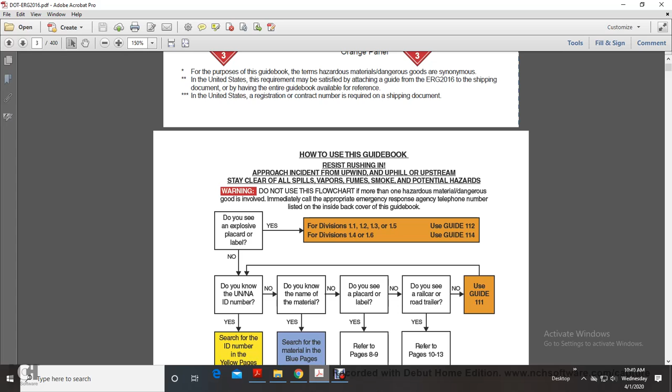So we have divisions 1.1, 1.2, 1.3, 1.5, use guide 112. Divisions 1.4, 1.6, use guide 114. Do you have explosive placards for them? If you did, yes, they would be orange.

And then, no, do you have the UN number? If no, then do you have the name of the material? If yes, you search the material in the blue pages. If you do have the number, the UN number and ID number, search the ID in the yellow pages and determine the guide number. Do you see the placard label?

Refer to pages 8 and 9. Do you see a rail car or road trailer? Use pages 10 through 13. And if no, use guide 111 and go back to the UN ID number.

Is the material highlighted in green? No, use the appropriate orange guide. Yes, is the material on fire? Yes, use appropriate orange guide for evacuation distance.

That's in green. Before an emergency, become familiar with this guidebook: local emergency telephone numbers, contractors, rail companies, federal, state, provincial agencies, and others.

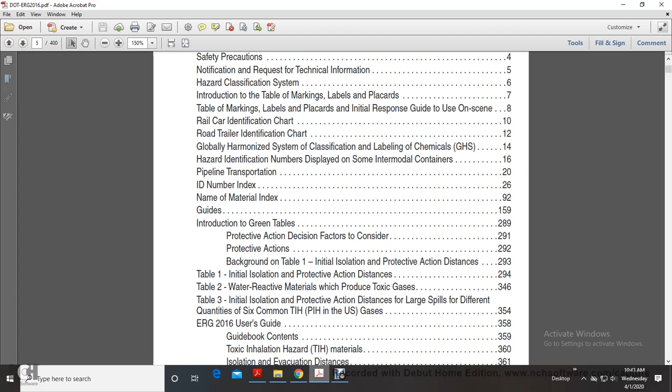Table 1, initial isolation and protective action distances. Table 2, initial isolation and protective action distances for water reactive materials that produce toxic gases. Table 3, initial isolation and protective action distances for large spills of different quantities of TIH or PIH gases in the U.S.

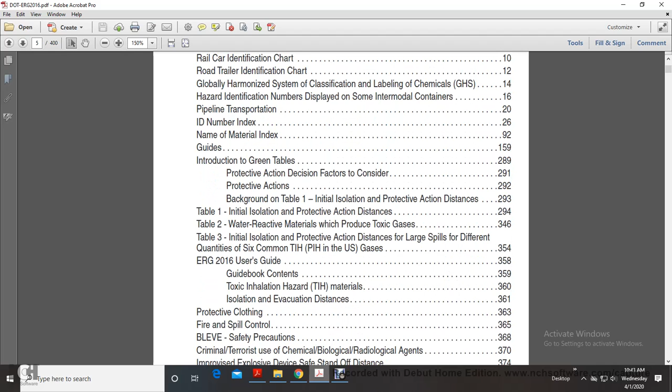Emergency Response Guidebook 2016 user guide content: toxic inhalation materials, isolation and evacuation distances, protective clothing, fire and spill control, BLEVE, safety precautions for criminal or terrorist chemical, biological, radiological agents, improvised explosive device safe stand-off distances, glossary, Canada-United States Response Center, emergency response assistance plans, emergency response telephone numbers.

Alright, safety precautions. Resist rushing in. Approach cautiously from upwind, uphill, upstream. Stay clear of vapor, fumes, smoke, and spills. Keep your vehicle at a safe distance from the scene. Secure the scene, isolate the area, and protect yourself.

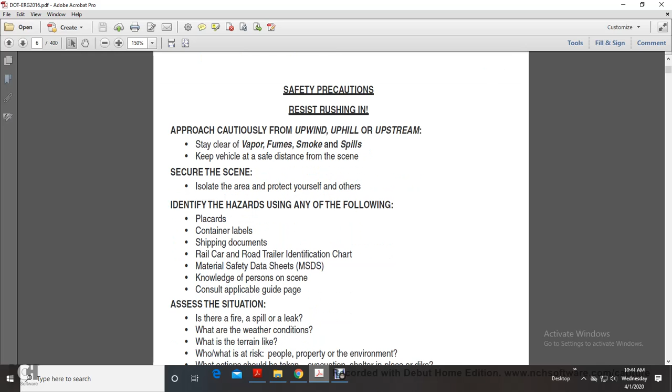Identify hazards using any of the following: placards, containers, labels, shipping documents, rail car or road trailer identification, material safety data sheets, and by knowing the person on the scene. Consult the applicable guidebook and guide page. Assess the situation: is there a fire, spill, or leak?

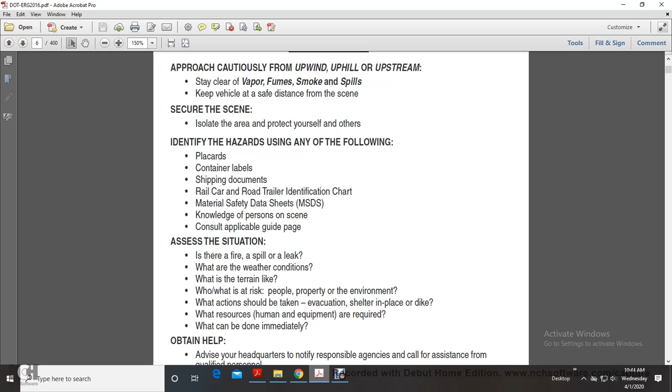What are the weather conditions and terrain like? Who and what is at risk - people, property, environment? What actions should be taken - evacuation, shelter in place, diking? What resources, human and equipment, are required? What can be done immediately?

Protective gear, rescue attempts, and protecting property must be weighed against your becoming part of the problem. Establish a command post and lines of communication. Continue to reassess the situation and modify your response accordingly. Consider the safety of people in the immediate area first, including your own safety.

Above all, do not assume gases and vapors are harmless because of a lack of smell. Odorless gases and vapors may be harmful. Use caution handling empty containers; they may still present a hazard until they are cleaned up, purged, and all residue removed.

Notify and request technical information. Follow the steps outlined in the organization's standard operating procedures and/or local emergency response plan. Obtain qualified assistance. The general notification sequence and request for technical information beyond what is available in the guidebook shall occur in the following order.

Notify your organization or agency; based on the information provided, that will set in motion a series of events. Actions may range from dispatching additional trained personnel to the scene, to activating the local emergency response plan. Ensure local fire and police departments have been notified.

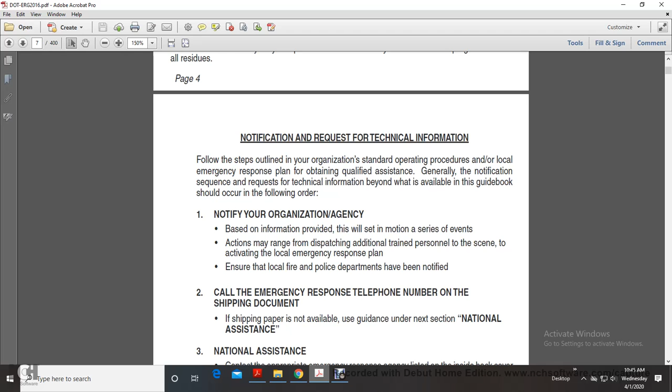Call the emergency response telephone number on the shipping document. If the shipping paper is not available, use the guidance under national assistance and contact the appropriate emergency response agency listed on the inside back cover of the guidebook.

Provide as much information as possible about the hazardous material and the nature of the incident. The agency will provide immediate advice for handling the early stages of the incident, will contact the shipper or manufacturer for more detailed information if necessary, and will request on-scene assistance if necessary.

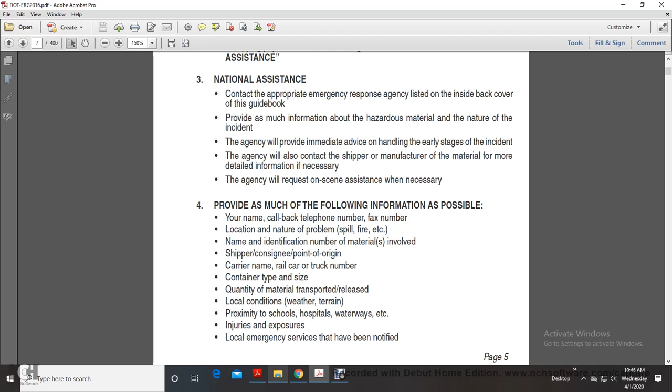Provide as much of the following information as possible: your name, callback telephone number, fax, location, and the nature of the problem such as spill or fire. Also provide the name and identification number of the material involved, shipper, consignee, point of origin, carrier name, rail or truck number, container type and size, quantity of material transported or released, local conditions such as weather and terrain, proximity of schools, hospitals, and waterways, injuries, exposures, and whether local emergency services have been notified.

The hazard classification system for dangerous goods indicates either by class or division number and name. Placards identify the class, division, and material. The hazard class and division numbers must be displayed in the lower corner of the placard, requiring both primary and subsidiary hazard class divisions if applicable, for other than Class 7 placards, indicating the hazard.

Division 1.1: explosives that have a mass explosion hazard. Division 1.2: explosives that have a projection hazard but not a mass explosion hazard. Division 1.3: explosives that have a fire hazard, and either a minor blast hazard, a minor projection hazard, or both, but not a mass explosion hazard. Division 1.4: explosives which present no significant blast hazard.

Division 1.5: very insensitive explosives with a mass explosion hazard. Division 1.6: extremely insensitive articles which do not have a mass explosion hazard.

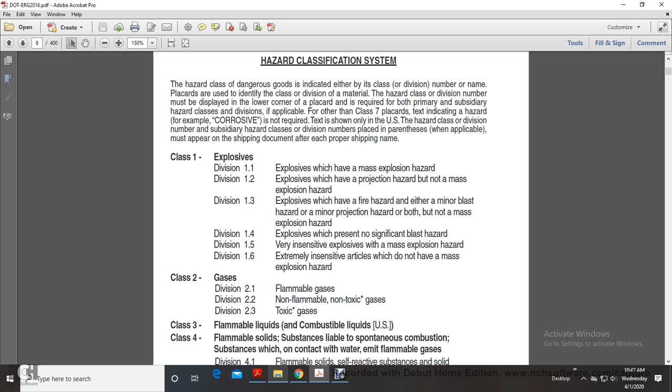Class 2, gases: 2.1 flammable gas, 2.2 non-flammable non-toxic gas, 2.3 toxic gas. Class 3: flammable liquids and combustible liquids.

Division 4.2: substances liable to spontaneous combustion. Division 4.3: substances which on contact with water emit flammable gas.

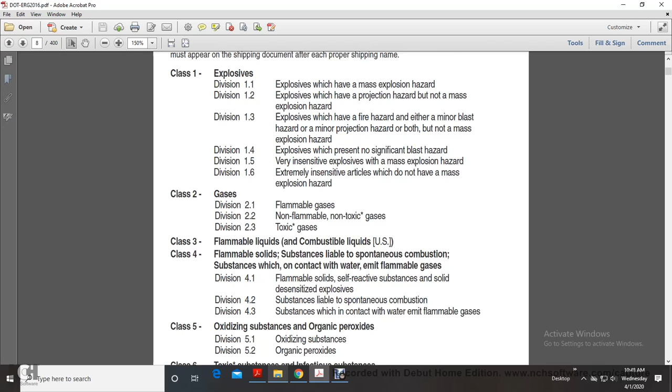Class 5: oxidizing substances and organic peroxides. Division 5.1: oxidizing substances. Division 5.2: organic peroxides.

Class 6: toxic substances and infectious substances. Division 6.1: toxic substances. Division 6.2: infectious substances.

Class 7: radioactive material. Class 8: corrosive substances. Class 9: miscellaneous dangerous goods, hazardous materials, and articles. The word poison or poisonous is synonymous with the word toxic.

Refer to the introduction table of markings, labels, and placards. Use the table only when the ID number and proper shipping name are not available. The next two pages display the placards found on transport vehicles carrying dangerous goods applicable reference guide circled. Follow these steps.

Approach the scene from upwind, uphill, or upstream, keeping a safe distance. Read the placard or orange panel using binoculars if available. Match the vehicle placard to the placard displayed on the next two pages, then consult the orange guide page associated with that placard.

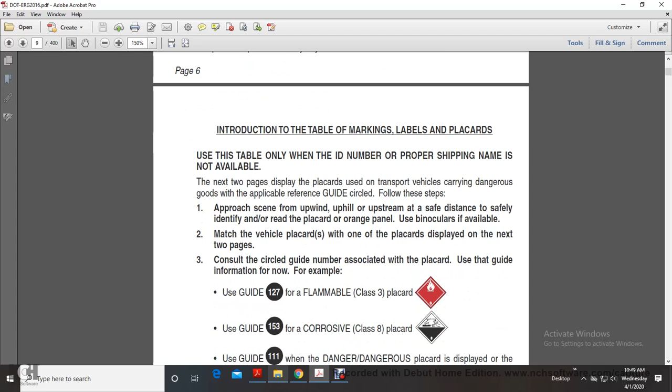Use the guide information as the example: use Guide 127 for the flammable Class 3 placard, and use Guide 153 for the corrosive Class 8 placard.

Use Guide 111 when the dangerous placard is displayed or the nature of the spill, leak, or burning material is not known. Use Guide 111 when dangerous goods are suspected but no placards can be seen.

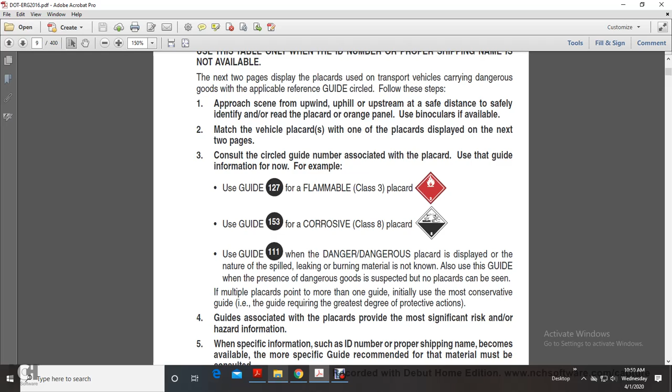If multiple placards point to more than one guide initially, use the most conservative guide, the one requiring the greatest degree of protective action. The guides associated with the placard provide the most significant risk and hazard information. When specific information such as the ID number or proper shipping name becomes available, the more specific guide recommended for the material must be consulted.

A single asterisk on the orange placards represents the explosive compatibility group letter. The asterisk must be replaced with the appropriate compatibility group letter. Refer to the glossary.

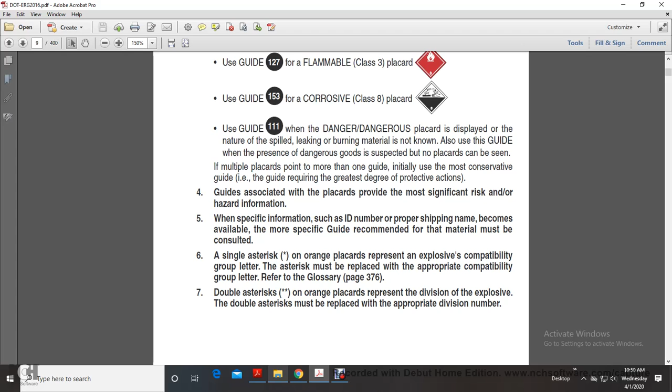Page 376. A double asterisk on orange placards represents the division of the explosive. The double asterisk must be replaced with the appropriate division number.

These are the table of markings, labels, and placards. Use the table only if the materials cannot be identified.

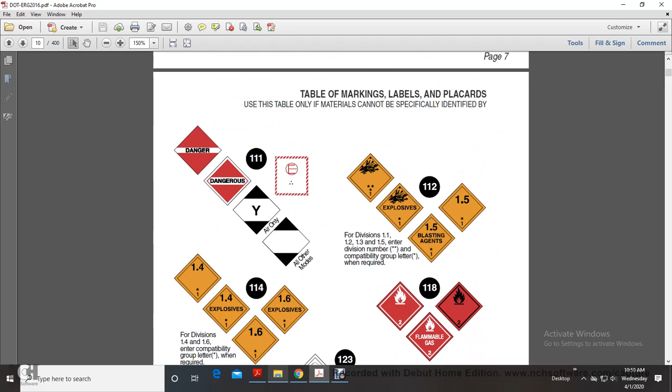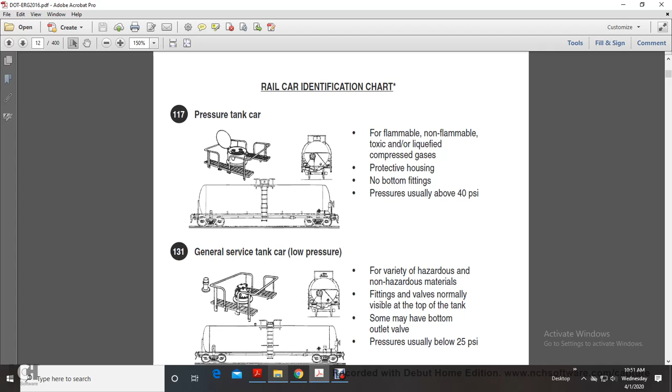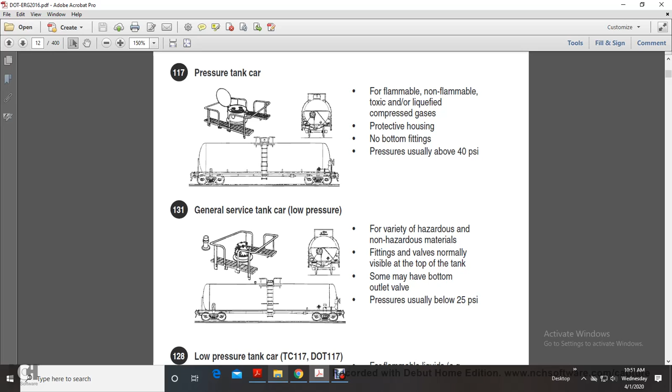131, general service tank car, low pressure, and it shows the top, the bottom, and the side. The sides and the top. Variety of hazardous, non-hazardous material fittings. Valves normally visible at the top of the tank. Some may have bottom outlet valves. Pressure usually below 25 psi.

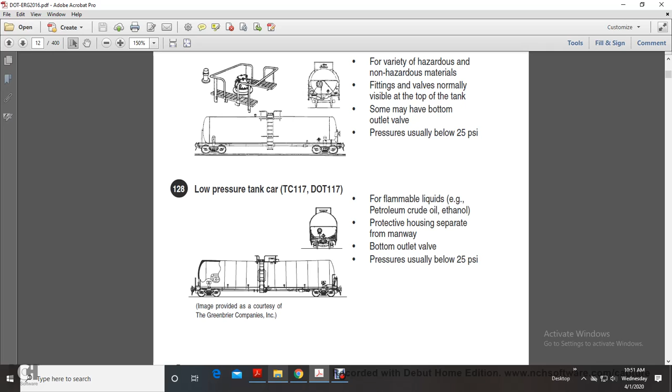Your low pressure tank, the TC-117 and the DOT 117. Image provided courtesy of the Greenbrier Companies Incorporated. For flammable liquids, petroleum, crude oil, ethanol, protective housing separated from the manway. Bottom outlet valve, pressure usually below 25 psi.

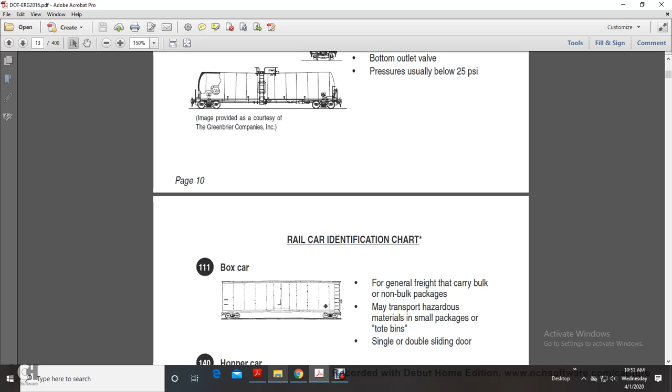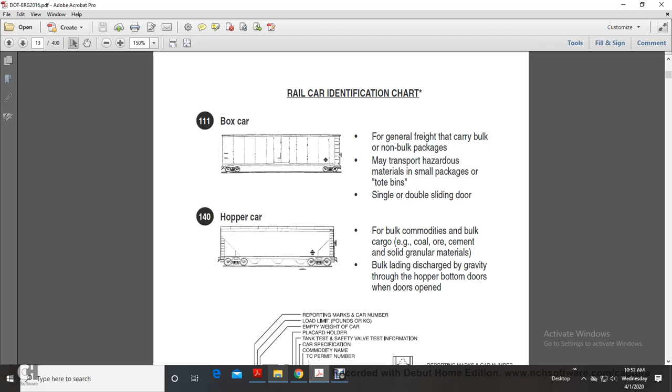Your boxcar, general freight car, barrel bulk, non-bulk boxes, packages, many transport hazardous material, small package, total, tote bin, single, double sliding doors - that's 111 for boxcar, 140 hopper car. For bulk commodities, bulk cargo, coal or cement, solid granular materials, bulk lading, discharge gravity through the hopper bottom doors when doors opened.

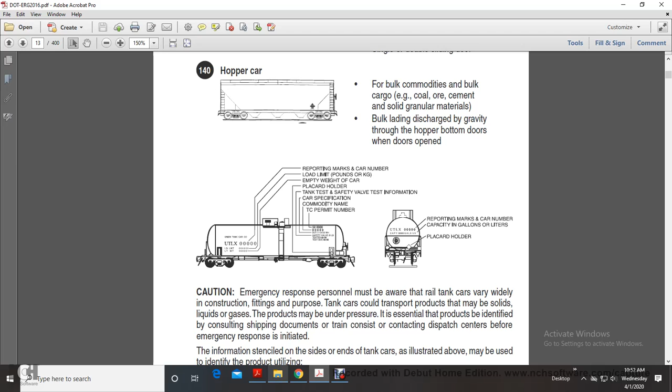And then it shows a tanker car with reporting marks, numbers, load limit pounds, empty weight, placard, tank test, safety valve test information, car specification, commodity name, permit number, reporting marks, car number, capacity in gallons, or liters, and placard holder.

Caution: emergency response personnel must be aware that railroad tank cars vary widely in construction, fitting, and the purpose of the products they transport. They may be solids, liquids, or gases. The products may be under pressure. For the identity of the product, consult the shipping paper and the train consist, contacting dispatch center concerns before emergency response is initiated.

Information stenciled on the sides or ends of the cars illustrated above may be used to identify the product, utilizing the commodity name shown. The other information shown, especially reporting marks and car number, when supplied to the dispatch center, facilitates identification of the product. Recommended guides should be considered as last resort if the material cannot be identified by other means.

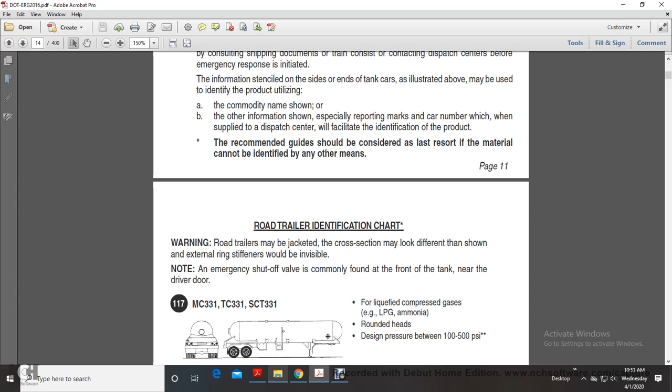Your road trailer identification chart. Road trailers may be jacketed and the cross-section may look different than shown. External ring stiffeners would be invisible. An emergency shutoff valve is commonly found on the front of the tank near the driver's door.

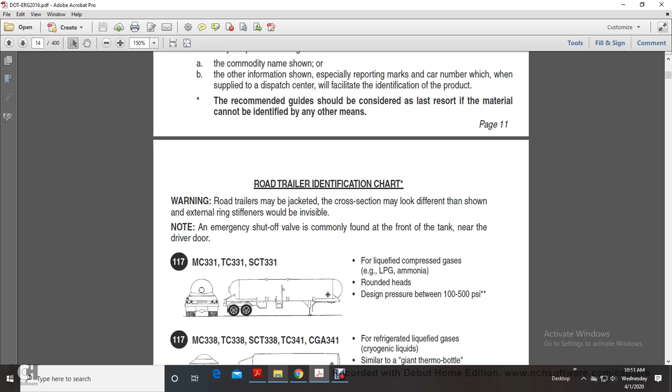117 MC331, TC331, SCT331. This is for liquefied compressed gases, round heads, design pressure 100 to 500 psi.

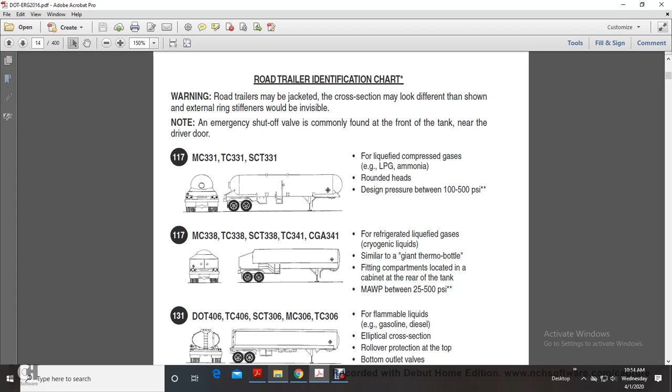Your 117 MC338, TC338, SCT338, TC341, CGA341. Refrigerated liquefied gases is cryogenic liquid, similar to a giant thermo bottle. Fitting compartments located in the cabinet over the rear of the tank. Maximum allowable working pressure from 25 to 500 psi.

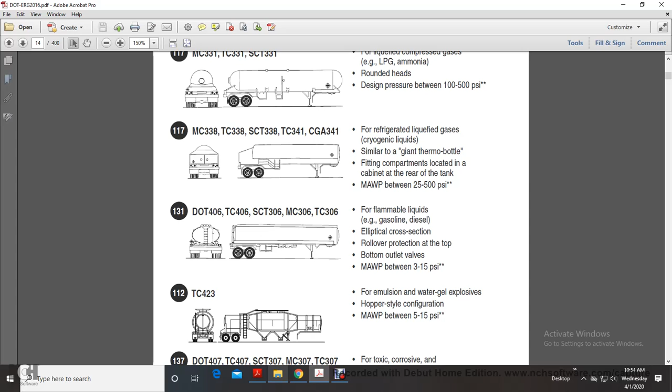The trailer 131 DOT406, TC406, SCT306, MC306, TC306, for flammable liquids, gasoline, diesel, elliptical cross-section, roll-over protection, top and bottom outlet valves, maximum working pressure 3 to 15 psi.

Your 112 TC423 for emulsion water gel explosive, hopper style configuration, maximum working pressure 5 to 15 psi.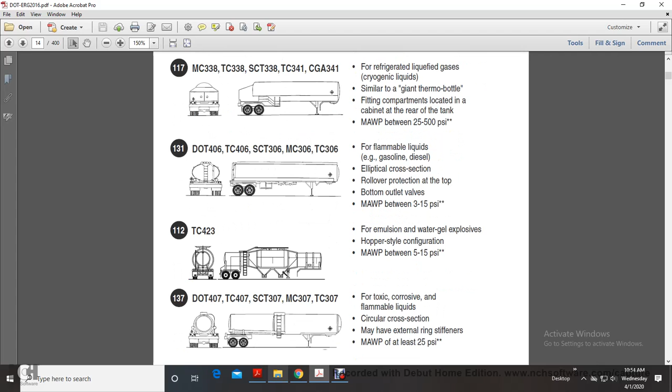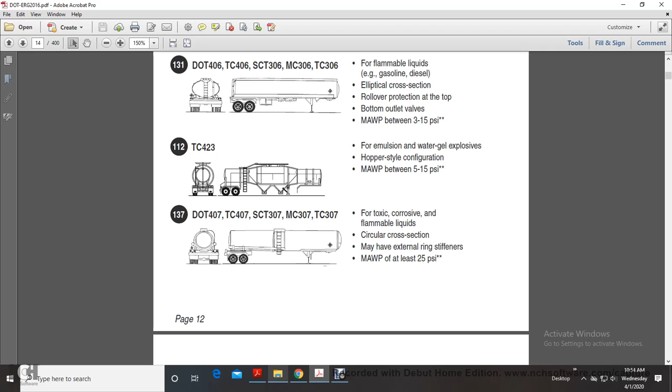Your DOT 407 TC407, the SCT307, the MC307, TC307, toxic corrosive flammable liquids. Circular cross section, may have external ring stiffeners, maximum allowable working pressure at least 25 psi.

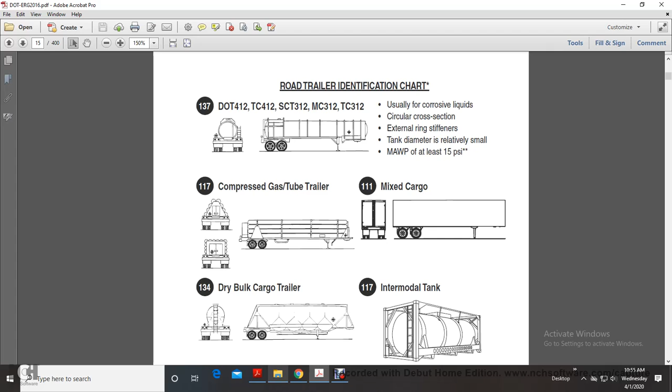DOT 412 TC412, SCT312, MC312, TC312, that's 137, usually corrosive liquid, circular cross section, external ring stiffeners, tank diameter relatively small, maximum working pressure 15 psi. And then shows 117 compressed gas tube trailer, 111 mixed tank, mixed cargo, 134 dry bulk cargo tanker, 117 intermodal tanker, 137 vacuum tanker.

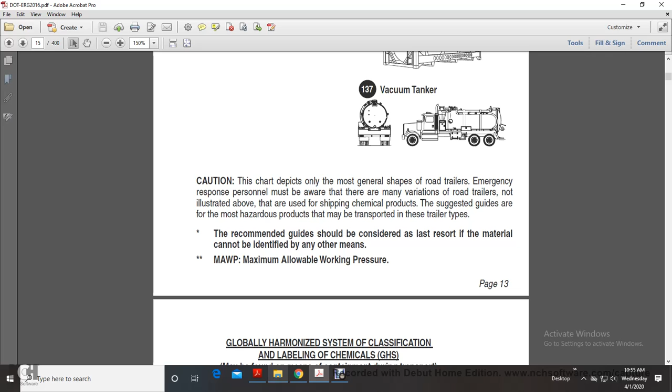Caution: this chart depicts only the most general shape of the road trailers. Emergency response personnel must also be aware of the many variations of road trailers not listed above used in shipping chemical products. Suggested guides are for the most hazardous product for transport in these type trailers. Recommended guides should be considered a last resort if material cannot be identified by any other means. MAWP means maximum allowable working pressure.

Globally harmonized classification label.

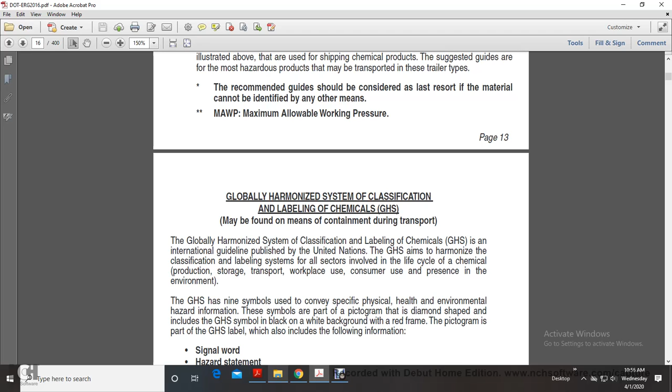The globally harmonized classification labeling is an international guideline published by the United Nations. The global harmonized system aims to harmonize the classification labeling system in all sectors involved in the life cycle of chemical production, storage, transportation, workplace use, consumer use, and presence in the environment.

The global harmonized system uses 9 symbols to convey specific health, environment, or hazard information. These symbols are part of a pictogram, diamond shaped, with the GHS symbol on a white background and a red frame. The pictogram is part of the GHS label, which includes the following information: signal word, hazard statement, precaution statement, product identifier, and supplier identification.

The global harmonized pictograms are similar in shape to transport labels, however transport labels have backgrounds of different colors. To eliminate confusion, the elements of the global harmonization system address the signal word and hazard statements, which are not expected to be adopted for transport. For substances and mixtures covered under UN recommendations, the transportation of dangerous goods model regulations and the transportation labels for physical hazards will have precedence in transportation.

The global harmonization system pictogram represents the same or lesser hazard. One reflected on transportation placards showing it may not be present could still exist in the package.

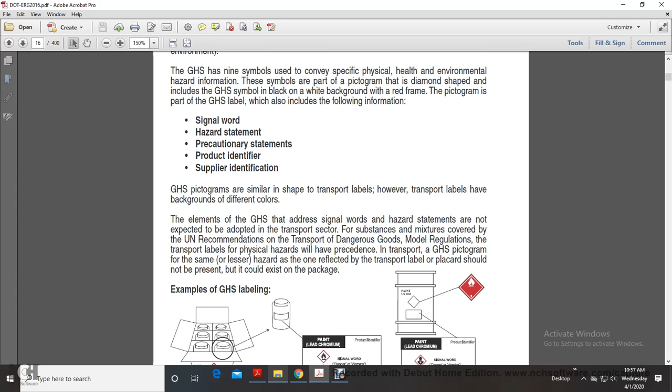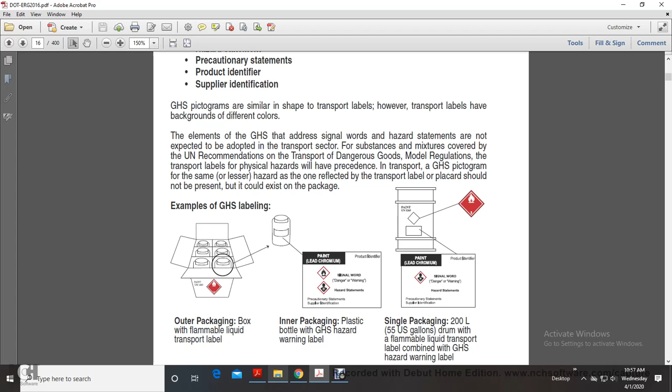Example: global harmonization labeling on outer packaging for a flammable liquid transport. Inner packaging is a plastic bottle with a global harmonization warning label. Single packaging of 200 liters, a 55-gallon drum, a flammable liquid transport container with a global harmonization warning label.

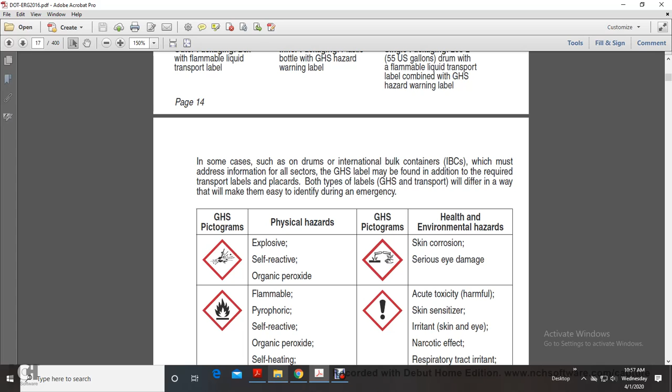In some cases, such as drums or international bulk containers, the information required for all sectors under the global harmonization system may be found in addition to the required transportation label and placards. Both global harmonization system and transport labels will differ in a way that makes them easier to identify during an emergency.

The top left shows the global hazard pictogram for explosive, self-reactive, and organic peroxide. Another shows a hand in water, indicating water-reactive metal, skin corrosive, and serious eye damage.

The flame symbol indicates flammable, pyrophoric, self-reactive, organic peroxide, self-heating, or emits flammable gas when in contact with water. The exclamation point indicates acute toxicity, harmful effects, skin sensitization, skin or eye irritation, narcotic effect, respiratory tract irritation, or hazard to the ozone layer.

The circle with the flame is an oxidizer. The star on the bottom is a respiratory sensitizer, mutagen, carcinogen, indicating reproductive toxicity, target organ toxicity, or aspiration hazard. The gas cylinder symbol indicates gas under pressure.

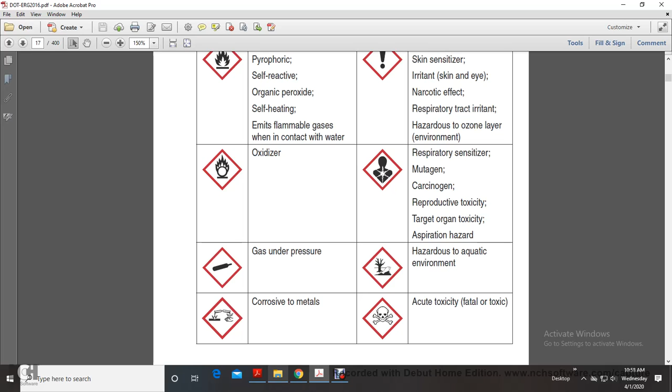The tree symbol shows hazard to the aquatic environment. The hand and material symbol shows corrosive to metals and skin. The skull and crossbones indicates acute toxicity, fatal, and toxic. Now, the hazard identification number displayed on some intermodal containers.

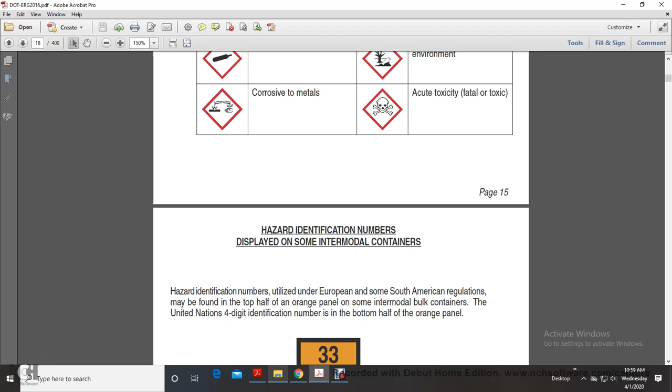The hazard identification number, utilized under European and South American regulations, may be found on the top half of the orange panel. Some intermodal bulk containers use the United Nations 4-digit identification number on the bottom half of the orange panel. The identification number on the top half of the orange panel consists of two or three digits, in general, the digits indicating the following.

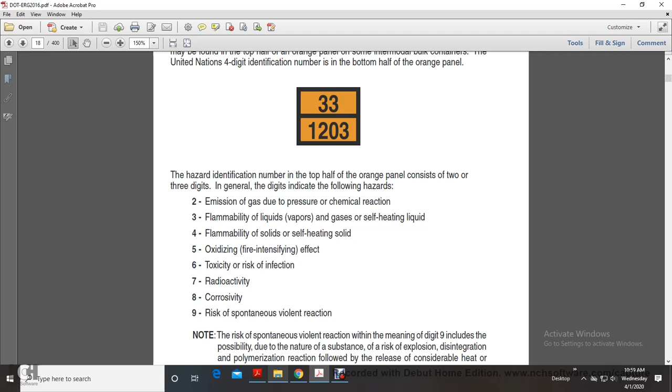2: emission of gas due to chemical reaction. 3: flammable liquid, vapor, gases, or self-heating liquid. 4: flammable solid or self-heating solid. 5: oxidizing, fire-intensifying effect. 6: toxic, risk of infection. 7: radioactive. 8: corrosive. 9: spontaneous violent reaction.

The risk of spontaneous violent reaction, meaning the 9 digit, includes the possible nature of the substance's risk of explosion, disintegration, or polymerization reaction followed by release of considerable heat, flammable, and toxic gases. Double digits indicate the intensification of a particular hazard.

For example, 33, 66, 88. When a hazard-associated substance can only be identified by a single digit, the digit is followed by a 0. A hazard indication preceded by the letter X indicates that the substance reacts dangerously with water.

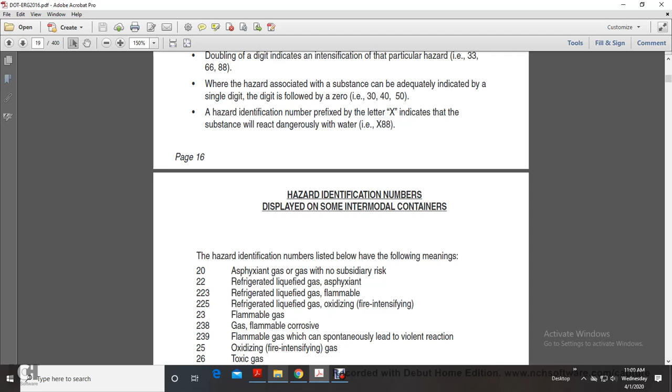Hazard identification numbers displayed on intermodal containers: 20, asphyxiant gas, no subsidiary risk. 22, refrigerated liquefied gas, asphyxiant. 223, refrigerated liquefied gas, flammable. 225, refrigerated liquefied gas, oxidizing, fire intensifier. 23, flammable gas. 238, flammable gas, corrosive. 239, flammable gas that may spontaneously lead to violent reaction.

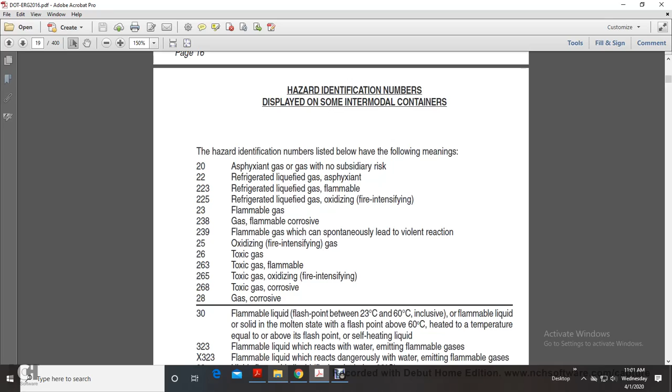25, oxidizing, fire intensifying gas. 26, toxic gas. 263, toxic gas, flammable. 265, toxic gas, oxidizing, fire intensifier. 268, toxic gas, corrosive. 28, gas, corrosive. And that continues on.

In North America, hazardous materials are commonly transported through millions of miles of pipelines and related structures. Products transported include natural gas liquids, crude oil, gasoline, diesel fuel, anhydrous ammonia, carbon dioxide, jet fuel, and other substances. Although most pipelines are buried, they are sometimes above-ground structures.

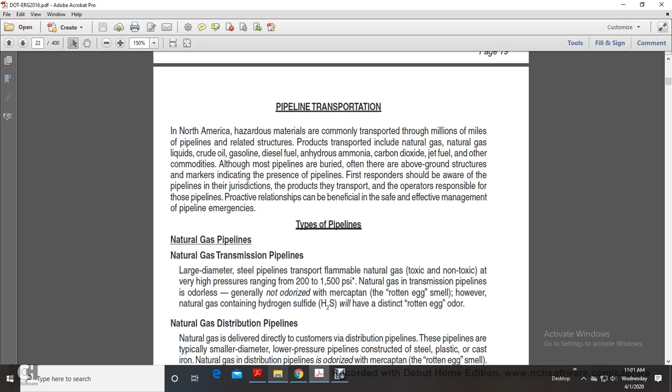Type of pipeline: natural gas transmission pipeline, a large diameter steel pipe that transports flammable natural gas, toxic or non-toxic, at very high pressure ranging from 200 to 1500 psi.

Natural gas transmission pipelines are generally odorless, not odorized with the recognizable rotten egg smell. However, natural gas containing hydrogen sulfide will have a distinct rotten egg odor. Natural gas distribution pipelines deliver natural gas directly to the customer via the distribution pipeline.

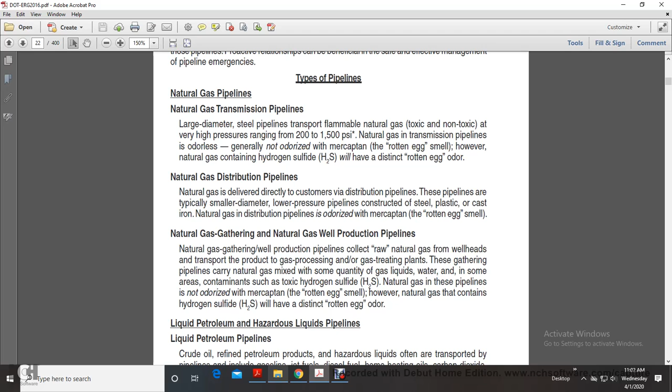These pipelines are typically small diameter, low pressure pipeline, constructed of steel, plastic, and cast iron. Natural gas in the distribution pipeline is odorized with mercaptan, giving it a rotten egg smell.

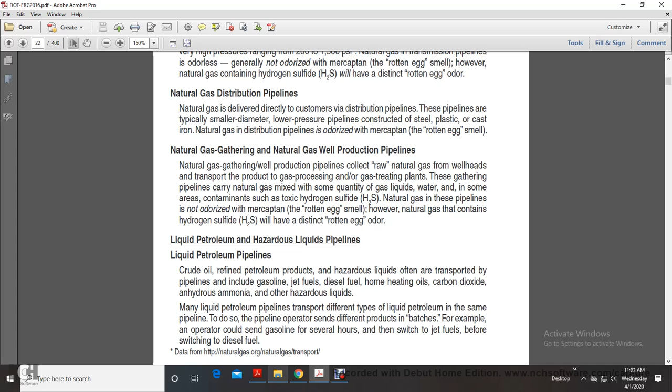Natural gas gathering and well production pipelines collect raw natural gas from wellheads for transportation to gas processing or treating plants. The gathering pipelines carry natural gas mixed with some quantity of gas liquids and, in some areas, contaminants such as toxic hydrogen sulfide. These pipelines are not odorized with mercaptan. However, the rotten egg smell can occur naturally when the gas contains hydrogen sulfide, which has a distinct rotten egg odor. Liquid petroleum and hazardous liquids pipeline.

Liquid petroleum, crude oil, and refined products are hazardous liquids often transported by pipeline, including gasoline, jet fuel, diesel fuel, home heating oils, carbon dioxide, anhydrous ammonia, and other hazardous liquids.

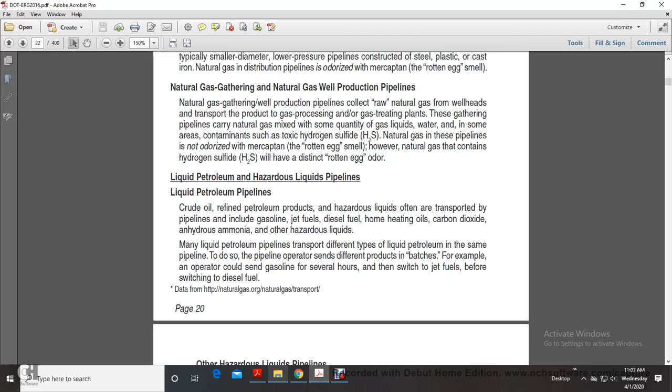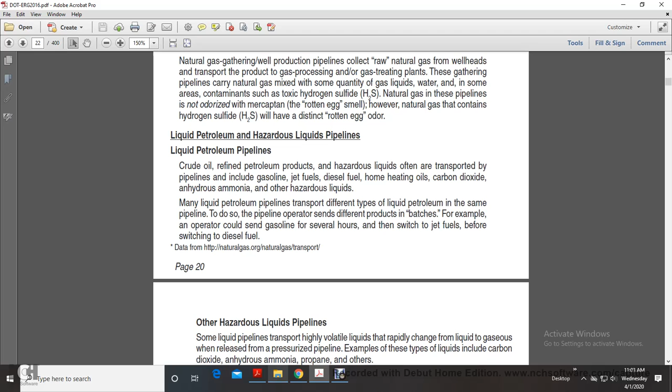Many liquid petroleum pipelines transport different types of liquid petroleum in the same pipeline. Pipeline operators send different product batches. For example, an operator could send gasoline for several hours, then switch to jet fuel before switching to diesel.

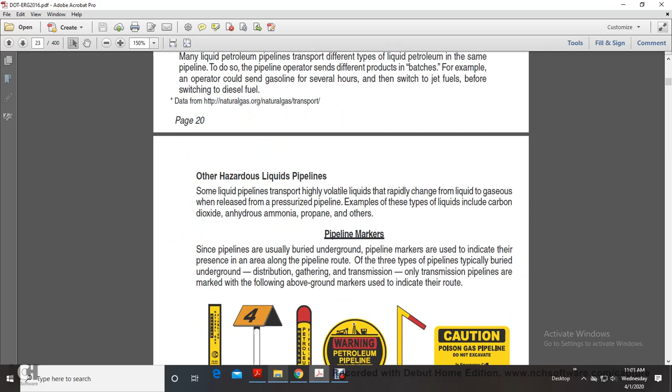Other hazardous liquid pipelines: some liquid pipelines transport highly volatile liquids that rapidly change from liquid to gaseous state when released from a pressurized pipeline. Examples of this type of liquid include carbon dioxide, anhydrous ammonia, propane, and others.

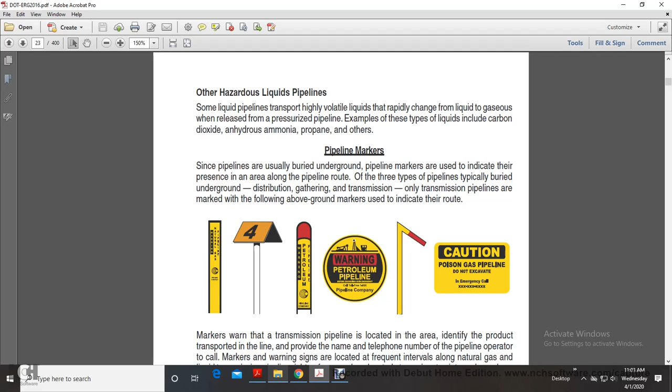Pipeline markers: since pipelines are usually buried underground, markers that indicate their presence along the pipeline route. The three types of pipelines that are buried underground are distribution, gathering, and transmission. Transmission pipelines are marked with above ground markers to indicate the route, such as these yellow gas line pipeline markers.

Markers warn that a transmission pipeline is located in the area, identify the product transported in the line, and provide the name and telephone number of the pipeline operator to call. Markings are located at frequent intervals along the natural gas and liquid transmission pipeline right-of-ways, and at prominent points such as where the pipeline intersects streets, highways, railways, and waterways. Pipeline markers only indicate the presence of a pipeline.

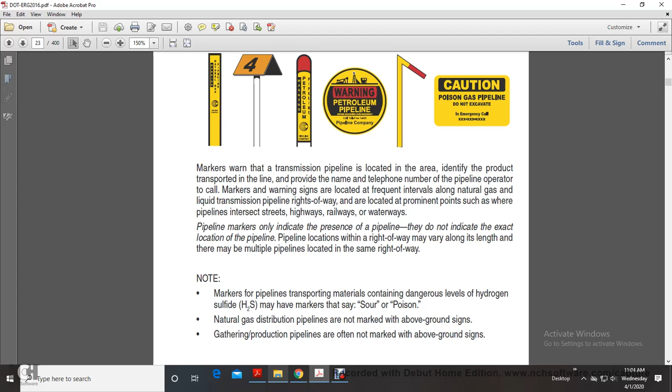They do not indicate the exact location of the pipeline. The pipeline's location within the right-of-way may vary along the length of the line. Multiple pipelines may be located within the same right-of-way.

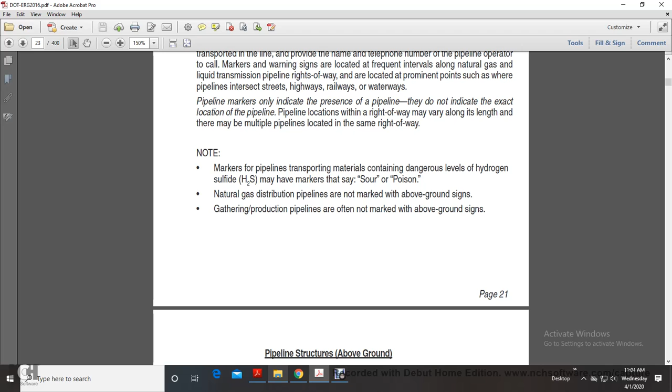Markers for pipelines transporting material containing dangerous hydrogen sulfide may have markers indicating 'sour' or 'poison' gas. Natural gas distribution pipelines are not marked with above ground signs. Gathering and production pipelines are often not marked with above ground signs.

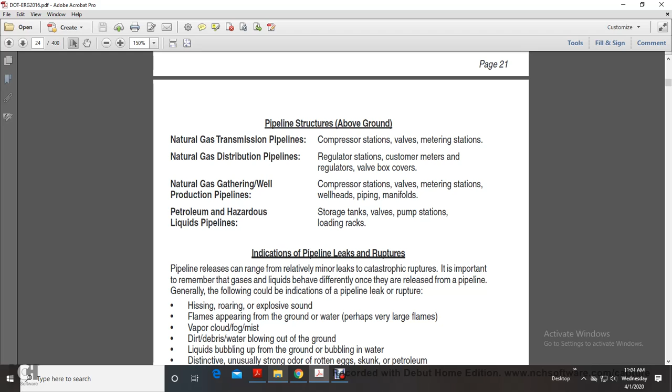Pipeline structures above ground include: natural gas transmission pipeline compressor stations, valves, and metering stations; natural gas distribution pipeline regulator stations, customer meters, regulators, and valve box covers; natural gas gathering and well production pipeline compressor stations, valves, metering stations, wellheads, and piping manifolds; and petroleum and hazardous liquid pipeline storage tank valves, pump stations, and loading racks.

Indication of pipeline leaks and rupture: pipeline releases can range from relatively minor to catastrophic ruptures. It's important to remember that gases and liquids behave differently once they are released from the pipeline.

Generally, the following could indicate a pipeline leak or rupture: hissing, roaring, or explosive sounds; flames appearing on the ground or water, perhaps a very large flame; vapor cloud, fog, mist, dirt, or debris; water blowing out of the ground; or liquid bubbling out of the ground or in the water.

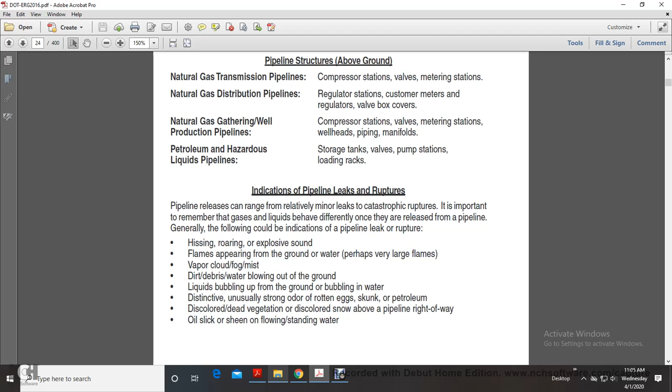Distinctively, there is an unusually strong odor of rotten eggs, skunk, or petroleum; discolored dead vegetation; discolored snow above the pipeline right-of-way; or an oil slick sheen on flowing or standing water.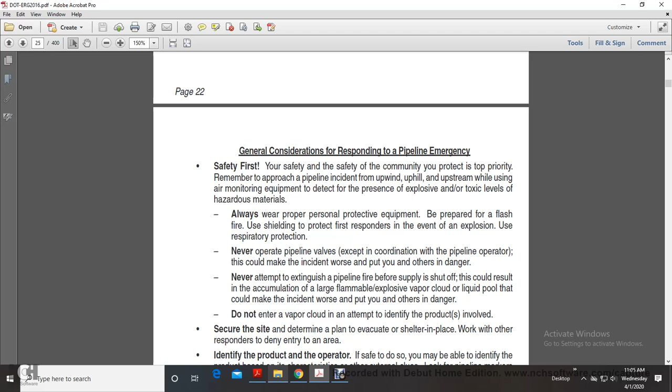General considerations for responding to a pipeline emergency: safety first. Your safety and the safety of the community are the top priority. Remember to approach the pipeline incident from upwind, uphill, and upstream, using air monitoring equipment to detect the presence of explosive or toxic levels of hazardous material.

Always wear personal protective equipment. Be prepared for flash fire. Use shields to protect the first responder in the event of an explosion. Use respiratory protection. Never operate pipeline valves except in coordination with the pipeline operator, as this could make the incident worse or put you and others in danger.

Never attempt to extinguish a pipeline fire before the supply is shut off. This could result in the accumulation of a large flammable, explosive vapor or liquid pool, which could make the incident worse and put you and others in danger.

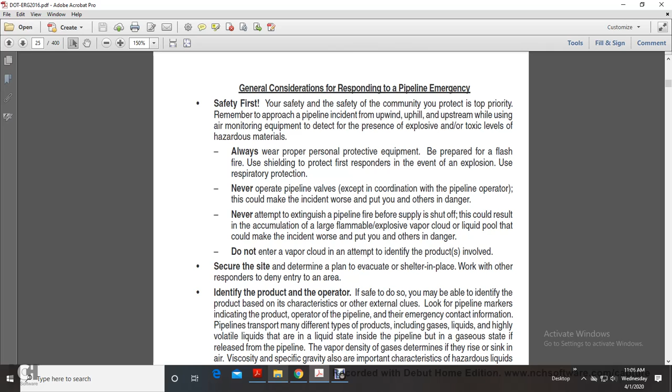Do not enter the vapor cloud to attempt to identify the product involved. Secure the site, then determine the plan: evacuate or shelter in place, work with other responders to deny entry, and identify the product and the operator.

If safe to do so, you may be able to identify the product based on its characteristics or other external clues, such as pipeline markers indicating the product or operator, and pipeline emergency contact information. Pipeline transportation involves different types of products, including gas, liquid, and highly volatile liquids that exist in liquid state inside the pipeline but in a gaseous state when released. Vapor density determines whether gas will rise or sink in air; viscosity and specific gravity are important characteristics of hazardous liquids to consider for identification of the product, helping determine the appropriate isolation distance of the affected area.

Notify the pipeline operator. Use the emergency contact information on the pipeline marker for the contact information you may have received. The pipeline operator will dispatch resources to you in response. Establish a command post and implement incident command structure as needed, within prepared immediate actions.

Implement a unified command as additional stakeholders and resources arrive. Other important consideration: if no flames are present, do not introduce ignition sources such as open flames, running vehicles, electric equipment, cell phones, pagers, two-way radios, lights, garage door openers, fans, door bells, etc.

Abandon equipment you have near the area of the pipeline for safety. Move far enough away from any noise coming from the pipeline to allow for normal conversation.

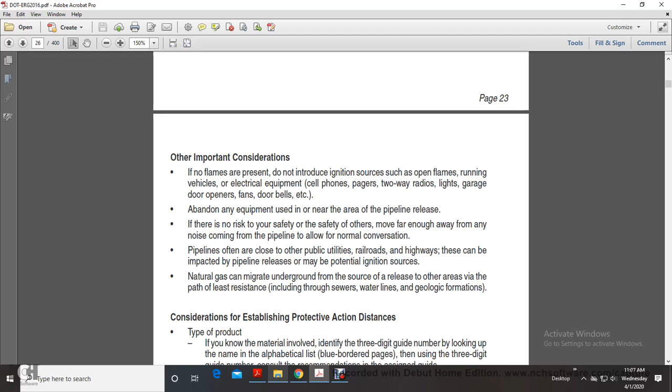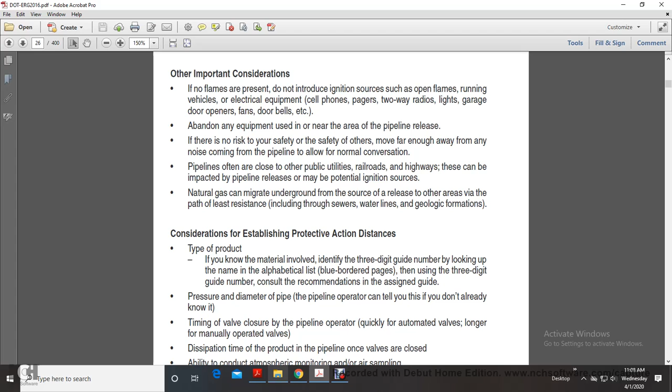Pipelines often run alongside public utilities, railroads, and highways. These can be impacted by a pipeline release and may present additional potential ignition sources. Natural gas migrating underground follows the path of least resistance for release, including through sewers, water lines, and geologic formations.

Other considerations include establishing the protective action distance for the type of product. If you know the material, look for a 3-digit guide number by finding the name in the alphabetical list in the blue bordered pages; using the 3-digit guide number will lead to the appropriate recommendation guide.

Consider the pressure and diameter of the pipe. The pipeline operator can tell you if you don't already know it. Time of valve closure depends on contacting the pipeline operator quickly. Automated valves close faster than manually operated valves.

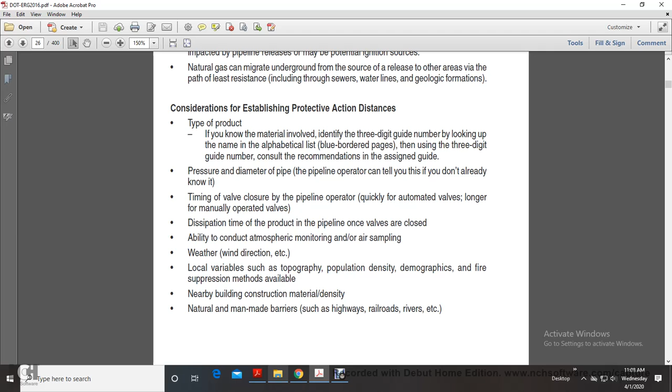Consider the dissipation time of the product in the pipeline once valves are closed, and the ability to conduct atmospheric monitoring, air sampling, and check weather and wind direction, etc. Local variables include topography, population density, demographics, and fire suppression methods available, nearby construction, material density, and natural or man-made barriers such as highways, railroads, and rivers, etc.

For U.S. pipeline resources on pipeline location, the National Pipeline Mapping System at phmsa.gov indicates the location of liquid and gas pipelines in the U.S. The pipelines depicted in the National Pipeline Mapping System are within 500 feet of the actual location.

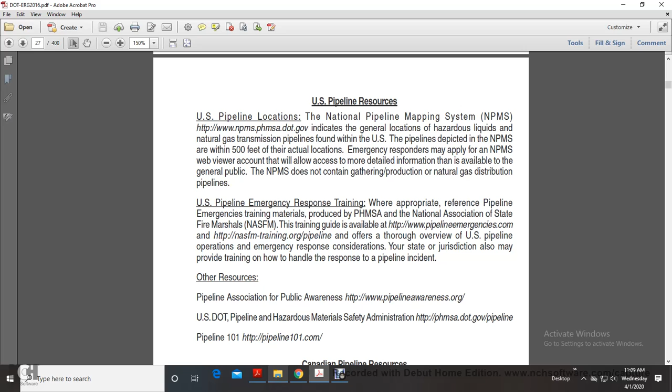Emergency responders may apply for access to the National Pipeline Mapping System web viewer, which allows access to more detailed information than what's available to the general public. The National Pipeline Mapping System does not contain gathering, production, or gas distribution pipelines.

For U.S. Pipeline Emergency Response Training, appropriate reference materials include PHMSA and National Association of State Fire Marshals training guides at pipelineemergencies.com. The NASFM Pipeline guide offers a thorough overview of U.S. pipeline operation, emergency response considerations, and state jurisdiction, and provides training on how to handle pipeline incident response.

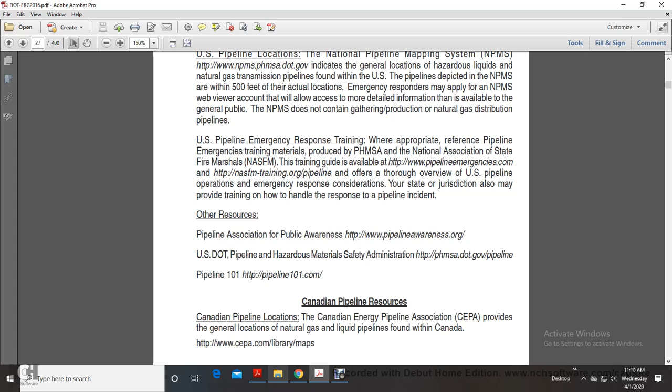Other resources include the Pipeline Association for Public Awareness at pipelineawareness.org, the U.S. Pipeline and Hazardous Materials Safety Administration at phmsa.dot.gov, pipeline101.com, and Canadian resources.

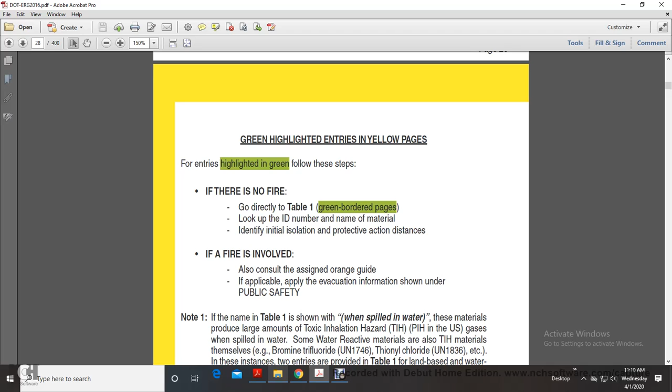Note number 1: if the name of the material is shown highlighted when spilled in water, these materials produce a large amount of toxic inhalation hazard, or poisonous inhalation hazard gases, when spilled in water. Some water-reactive materials with toxic inhalation hazards include bromine trifluoride, thionyl chloride, and others, with UN numbers 1746 and 1836.

In these instances, two entries are provided in Table 1 for land-based and water-based spills. If the water-reactive material does not have a toxic inhalation hazard when spilled in water, Table 1 and Table 2 do not apply, and the safety distance will be found in the appropriate orange guide.

Note 2: explosives are not individually listed by ID number because the emergency response is based on the division of explosives, not on the individual explosive. For divisions 1.1, 1.2, 1.3, and 1.5, refer to guide 112. For divisions 1.4 and 1.6, refer to guide 114. And then it continues from there.

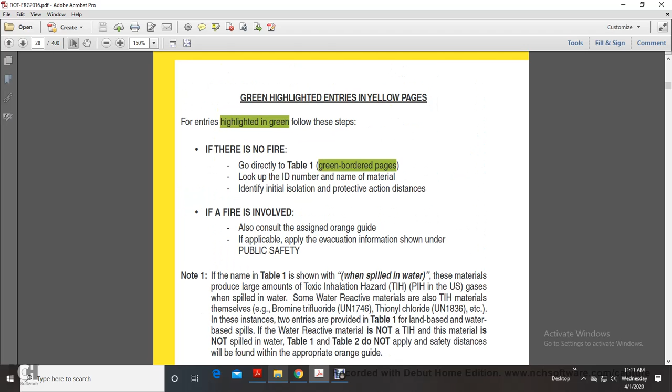Here's your green highlight for entries: go directly to Table 1 in the green bordered pages. It continues with a list of identification numbers, guide numbers, names, and numbers.

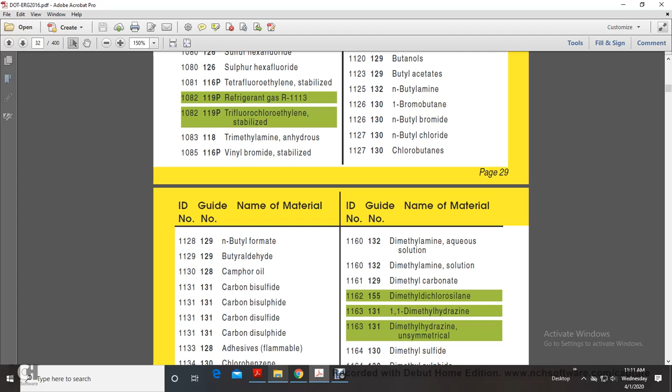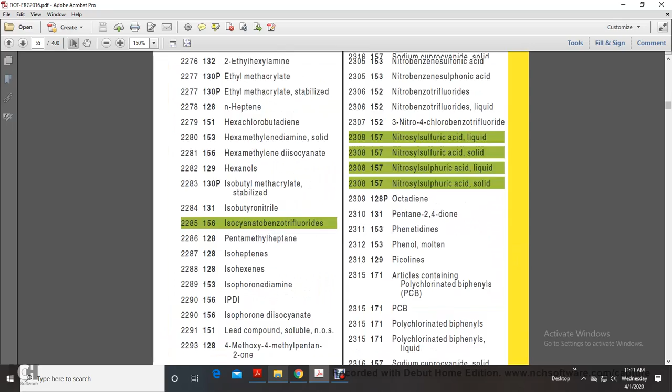The identification number, guide, name, and number listings continue for several pages. We'll just keep scanning, and we'll come back with tape 2 when we get to the blue pages, I believe.

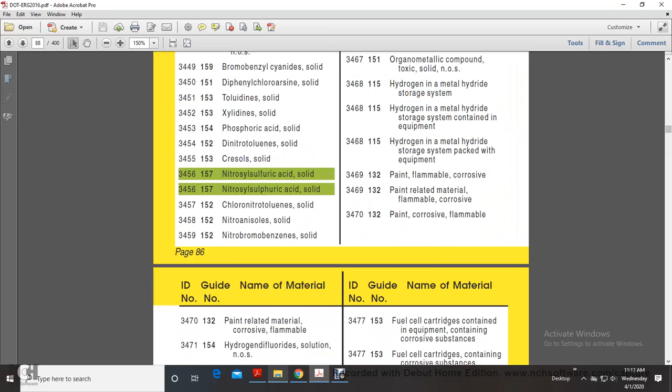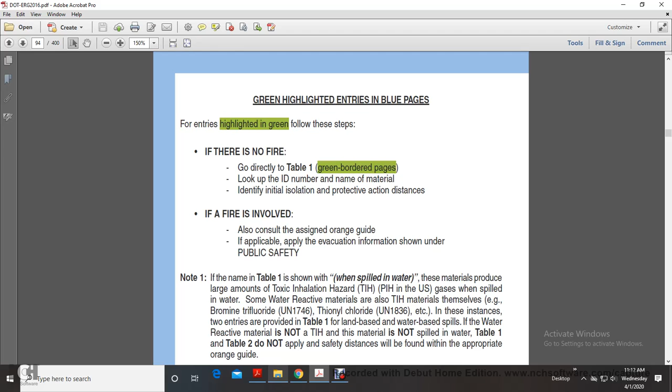Alright, that was the yellow pages. Now we're going to go to the blue pages, and we're going to take this note, and we'll cut the tape there.